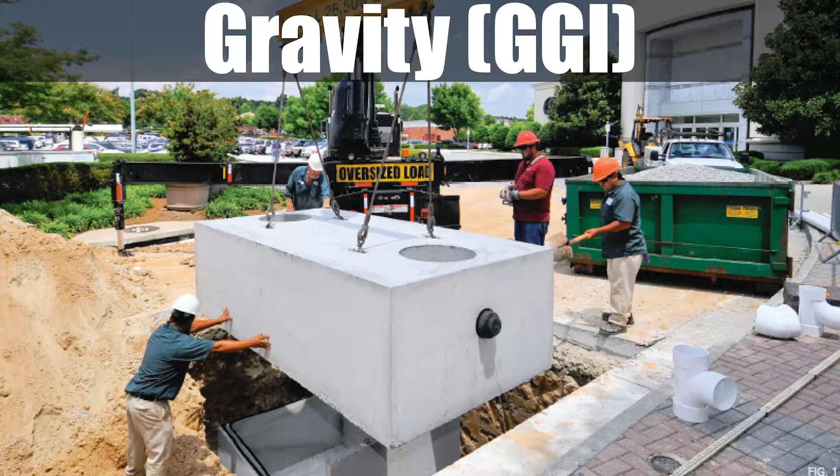So first we're going to start with technology. This is probably the most obvious one. It's the one that many people in my position would talk about because it's the one that we kind of know. Our company makes grease interceptors. And so predominantly we're going to be talking about grease interceptors when we're talking about technology. So gravity grease interceptors are what everyone is comfortable with. How many of you have seen a gravity grease interceptor installed in your area or have approved one or inspected one? Show of hands. Great.

Awesome. By the way, this is going to be interactive. I have an education background. I used to teach high schoolers. And so if I don't get good interactivity or good questions, if I'm not getting interrupted, I start to talk more slowly. So please, at any point in time, feel free to raise your hand, ask a question. I don't have a slated time for Q&A because I expect it to happen as we're talking through this.

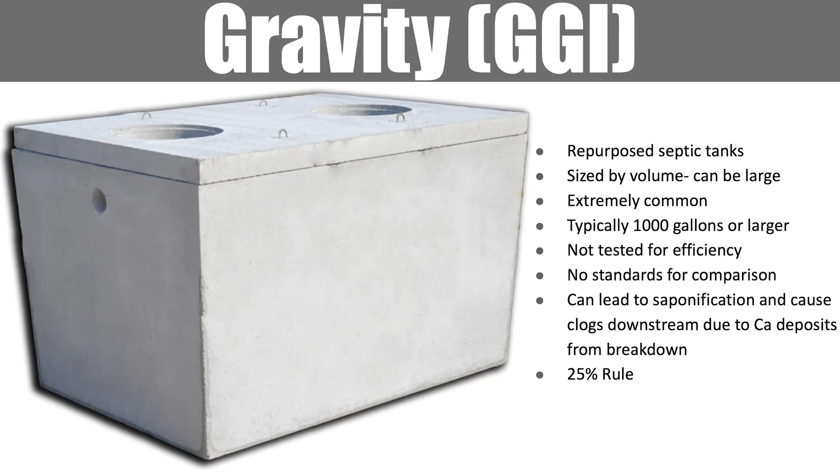All right? So gravity grease interceptors, these are really, really common. These are, many of them, repurposed septic tanks. Anyone that was in Ken's talk on Monday would know that. These are sized by volume, which means they can get quite large. They are extremely common. They're typically 1,000 gallons or larger. So 1,000 gallons is usually the small ones. And these are not tested for efficiency, and as such, there's really no good standard for comparison. Now, there are a number of brands that make these, but there's not a great way to say that this one is better or different in any way than another one.

This is kind of heavy stuff, but they can lead to saponification and cause clogs downstream due to calcium deposits from breakdowns. There's a lot of calcium in concrete in particular, and it can cause hard blockages in your downstream sewer system. And then these abide by the 25% rule, which we'll get into in a minute.

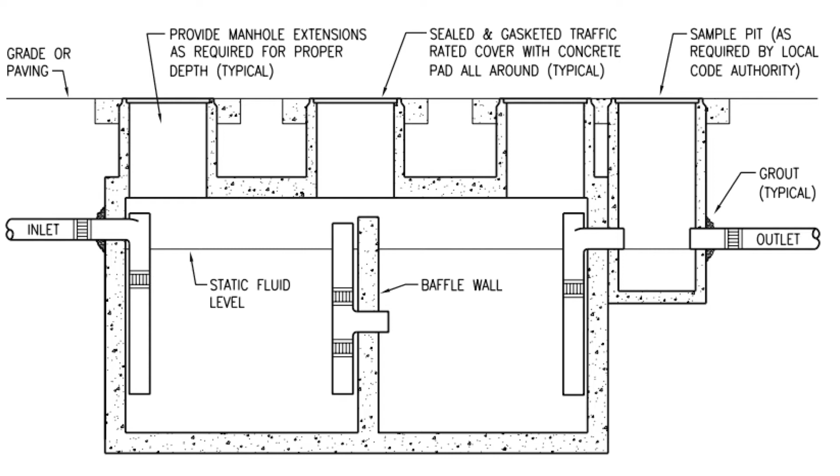So this is a standard cutaway of a gravity grease interceptor. You'll see many of them have multiple chambers, and this is to help with the capture of grease and the retention of grease. So grease interceptors should serve two functions. They should capture grease coming in, but then they should also hold on to grease that they've caught. Some of them won't have a baffle. Some of them are just one big open chamber. Some of them will have multiple baffles.

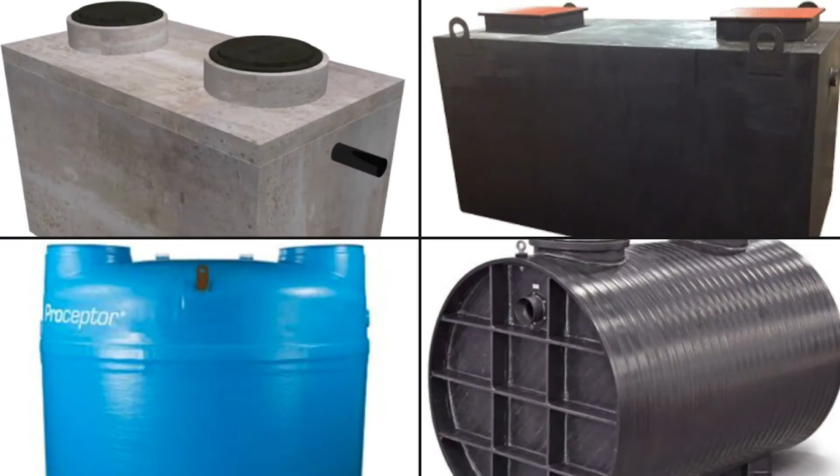So the most common material these are made out of is going to be concrete. Concrete is really cheap to manufacture. Concrete is what septic tanks have been made out of for a long time. And so concrete is what you probably have seen if you have approved these or inspected them in the field. But we also see these made out of steel nowadays, and concrete and steel, of the materials currently being used in production, are the ones that will break down and corrode because of the nasty environment that is a grease interceptor.

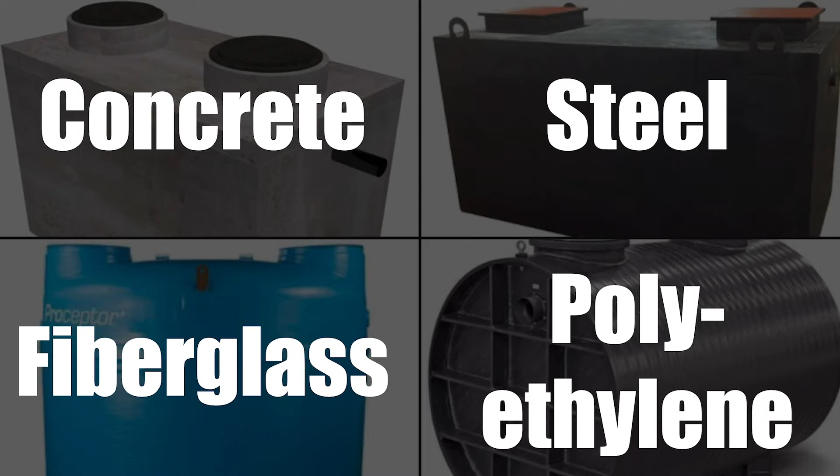Fiberglass is pretty common. It's going to have a long shelf life, but when it does break down and corrode, you've got fiberglass to deal with, and so it can be a mess if they ever do break. They're also a little bit more delicate in shipping. Polyethylene is what we're seeing some manufacturers moving to now.

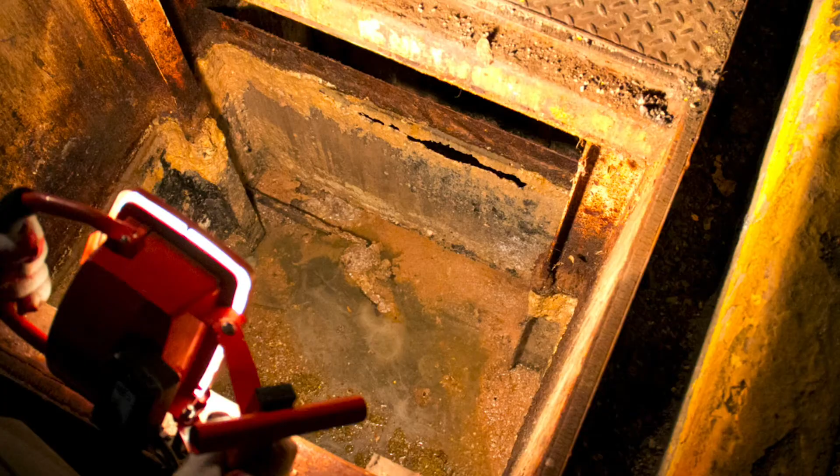So this is an example of a steel tank. This is a 5-year-old steel interceptor. You can see the baffle wall is totally corroded and had to be replaced. This is a concrete interceptor that was found leaking.

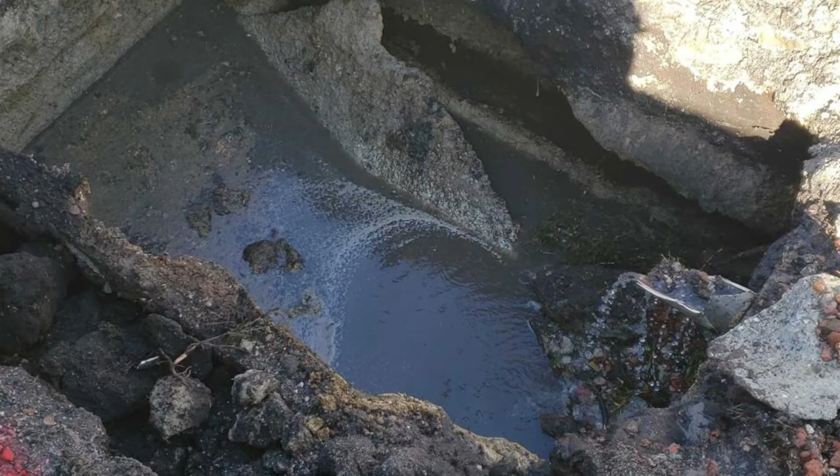Now this particular one, the city was going through a new code enforcement. This is in Miami-Dade County, Florida. The code enforcement required a changeover in their plan review process. Nobody could understand the new plan review process, so it took 4 months for them to get this replaced.

Meanwhile, the Olive Garden where this was installed was having to have 3 pump trucks per day come and put their hose straight into the inlet side of the interceptor to capture all of the effluent from the kitchen. Cost them over $350,000 in the 4 months it took to get through plan review.

So what kind of testing do these undergo? The hydrostatic water test. They fill it up with water, and if it hasn't leaked too much in 24 hours, it's good. I mean, you don't want it to leak too much, but this is the only test and certification that gravity grease interceptors have to undergo. They are assumed to work. They work on detention or retention time, depending on who you're talking to.

The challenge here is, the idea is that you have this big tank of water. When the kitchen effluent enters in, there should be some volume of water enough that the grease can rise and be separated and captured before it reaches the outlet side of the interceptor. Why this is kind of up for debate is no one can really agree on how long is the right amount of time. So looking across codes, you'll find codes that say 30 minutes is the right amount.

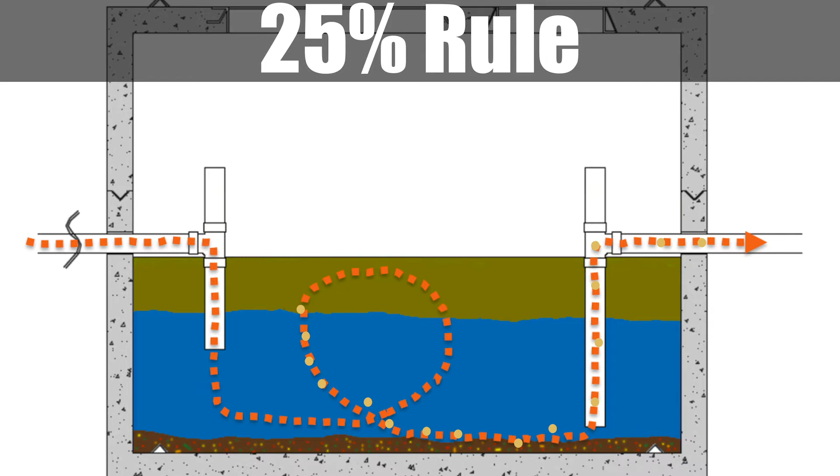So there is turbulent flow inside of a gravity grease interceptor because you have this big empty chamber, you have settled colder water coming in contact with hot water from the kitchen fixtures. When that happens, it becomes turbulent. There's no baffle structure, even in gravity grease interceptors with a baffle wall. This issue is actually worse than ones without.

You heard Ken Laux the other day reference the WRF study. This was done by NC State University and Joel Ducoste. And they found that without a baffle wall, it actually performed better. But what can happen is you get this turbulent effect, and the deeper the grease layer is built towards the flow of that turbulent water, the more likely it is to lose already captured grease.

And so you have to pump these out when they're 25% full of grease, which means 75% of a 1,000-gallon concrete grease interceptor is just holding water so that it can work properly. So if any of you are from a district where water is a premium resource, a lot of your water is just sitting in the ground so that the gravity grease interceptors in your district can work.

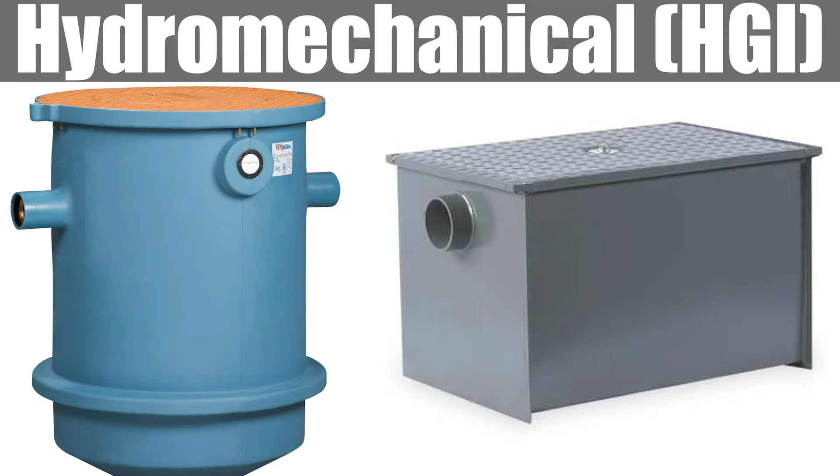So next up are hydromechanical grease interceptors. These are newer. The gravity grease interceptors are 100 years plus old technology. These are 40-ish years old, have been really engineered over the last 20 years. So hydromechanical grease interceptors are usually constructed of polyethylene, steel or fiberglass. There are not any hydromechanical grease interceptors made of concrete that I'm aware of.

These are sized by flow rate. They are not sized by volume. And they are typically less than 300 gallons in volume, though there are a couple of companies that are coming out with ones up to 1,000 gallons.

So instead of being full when they have 25% of their volume as grease, these can hold, some of them, as much as 90% of their volume with grease, which means you can hold the same amount of grease in a much smaller interceptor. So these use baffles and flow path to capture grease and not the detention time. So it is a different way of performing the same function that doesn't require as much volume. These have been engineered for grease capture and for grease retention.

As such, these are certified under a couple of different certifications. Most are certified under the ASME A112.14 or PDI G101. And they are tested for grease removal efficiency, and most of them are tested to maximum grease capacity. So most of these are tested to the failure point. I'll talk about that in a minute.

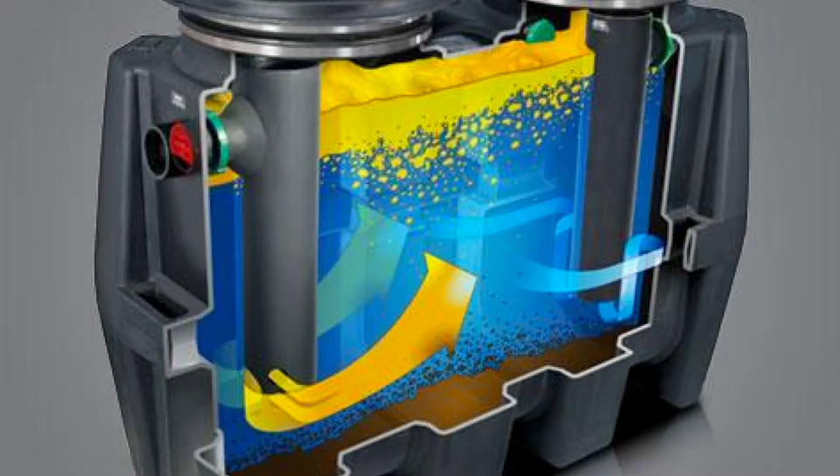So this is a cutaway of what one looks like. You'll notice it doesn't actually look all that different from a gravity grease interceptor. There is engineering that has gone into maximizing the flow path, making sure that the baffles are in the right place, making sure the inlet and outlet are appropriately oriented, that allow this to operate at a higher level of efficiency. So let's talk about the testing process.

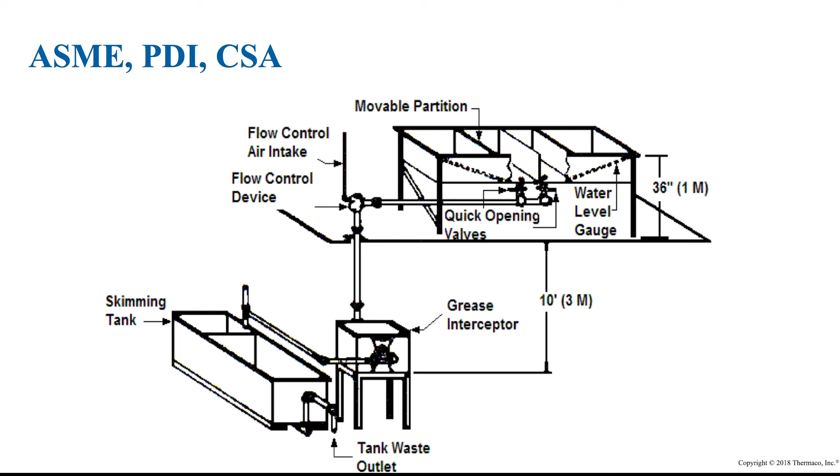So ASME, PDI, and CSA, these are three testing standards that are all pretty much exactly the same. This is how all hydromechanical grease interceptors that are certified are tested. You might find something online that is just a box that has no certification. That absolutely shouldn't be approved, but any of the large manufacturers are going to have these certifications. So here's how the test is done.

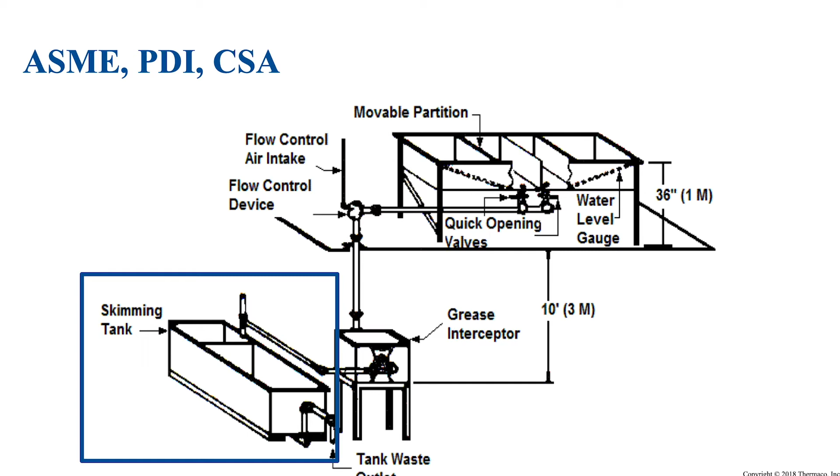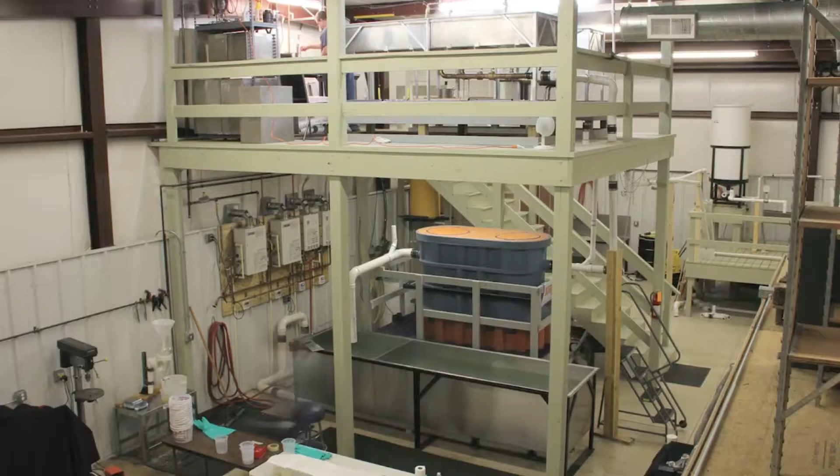We have a couple of sinks that we fill with water and a known amount of liquid lard. It then drops 10 feet into the grease interceptor, and we capture all of the effluent that comes out of the grease interceptor. We then measure how much liquid lard has escaped the interceptor and compare it to how much went in, and that allows us to calculate the efficiency. So this is a test rig. This is our test rig in North Carolina. You can see here we've got sinks up the top, goes through the grease interceptor, and then there's a skimming tank where we capture any grease that has escaped.

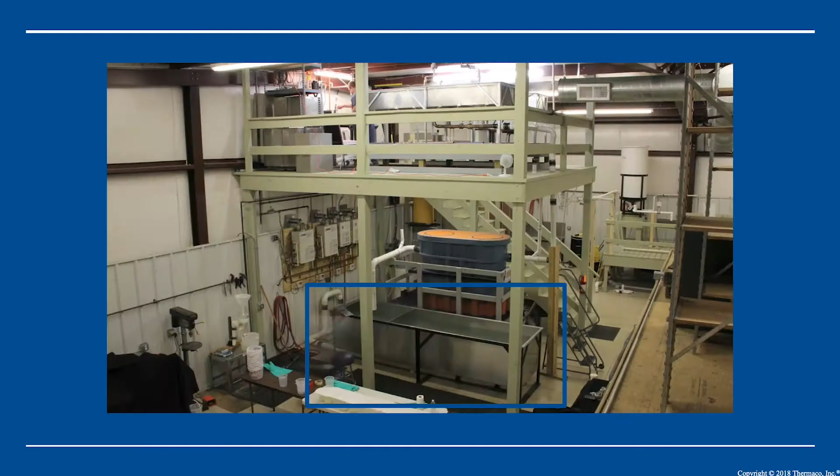So you have never seen chunks of lard as big as we have in our freezer at R&D. So this is being liquefied. It's being heated to between 150 and 160 degrees Fahrenheit. There it is, liquidy. We add water to 2 sink compartments between 150 and 160 degrees Fahrenheit. And we will add the lard to one of the 2 sink compartments, and we're going to be alternating.

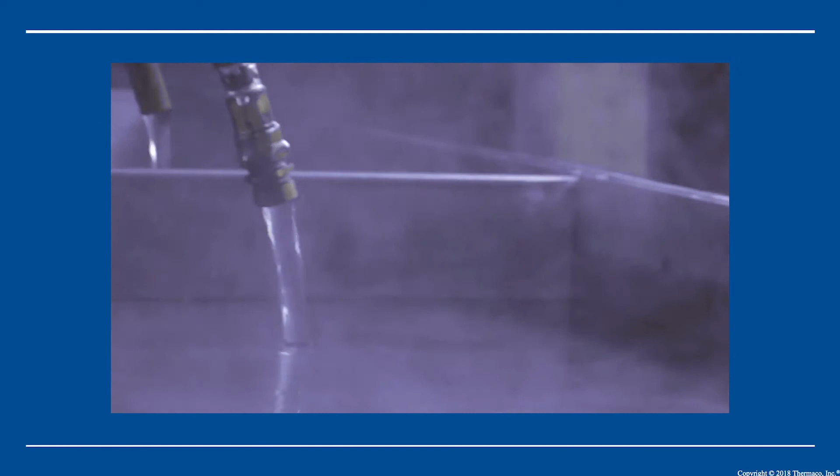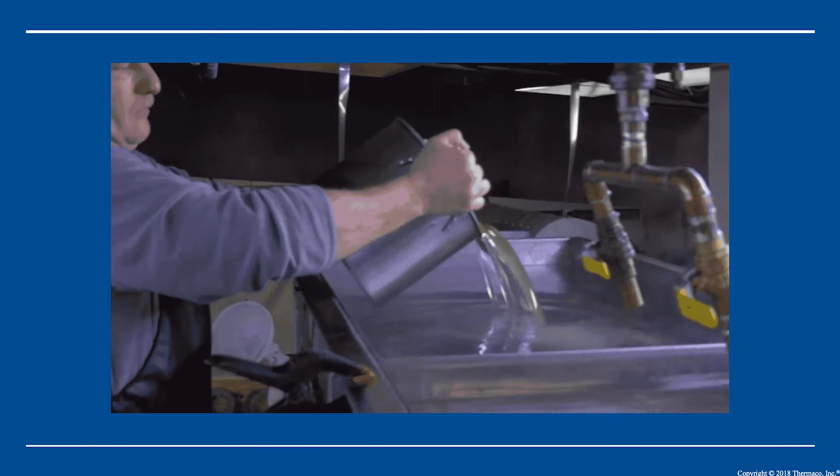Now, the amount of water that goes into the sink compartments is double the tested flow rate. So let's say we're testing for 100 gallon per minute flow rate. We would use 200 gallons of water per test, and we use 1 pound of lard for every 10 gallons of water. So in this one, we would use 20 pounds of lard. It then drops 10 feet through the interceptor, and we're capturing everything that comes out on the other side.

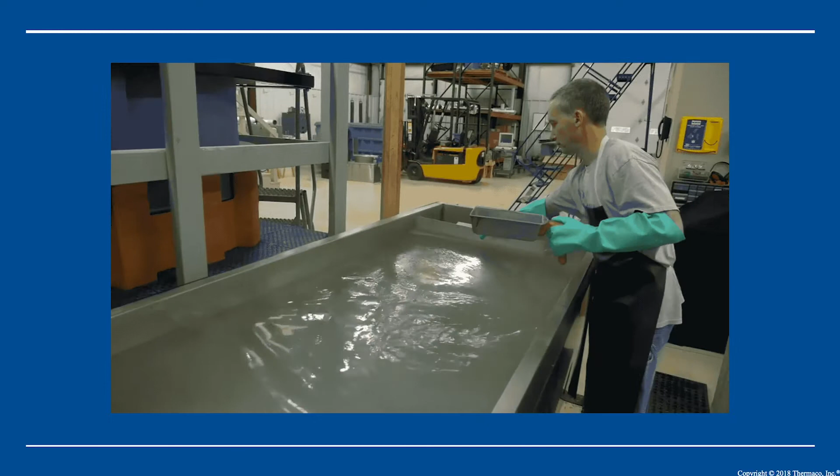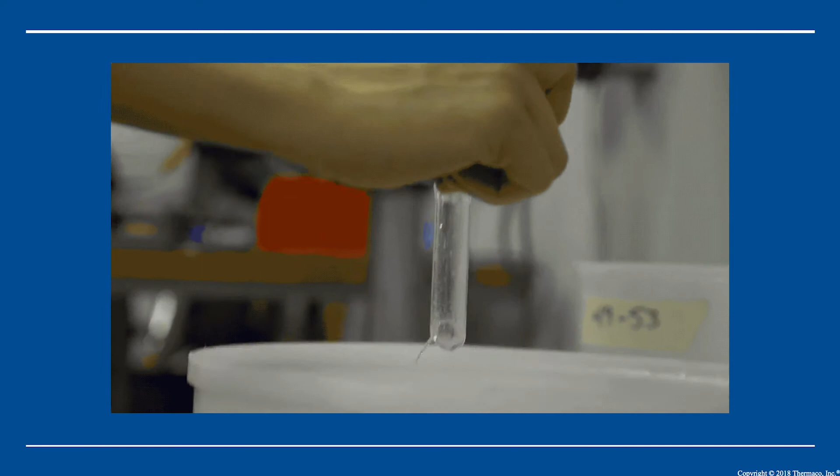We then skim off any of the liquefied lard that is going to be floating on top, and we're capturing that, and then we're going to pour it into a separatory funnel. And this is just to remove any extra water that we skimmed up. We then measure those, and we take those measurements, and we're going to calculate based off of the known amount of lard that went in, how much was able to escape.

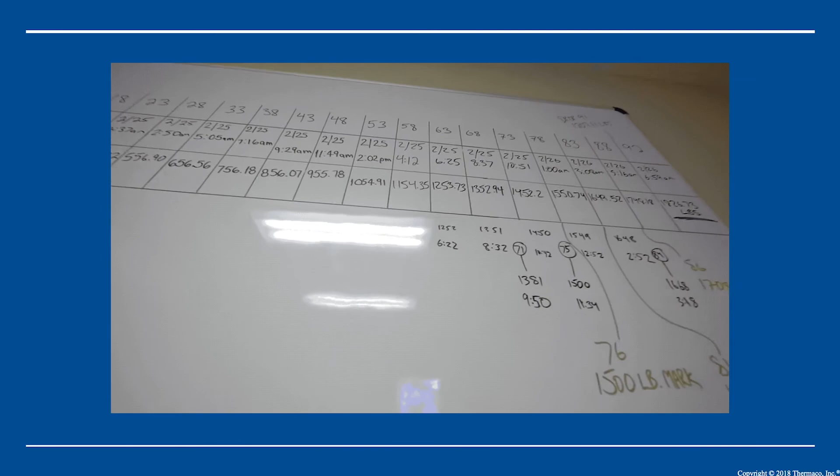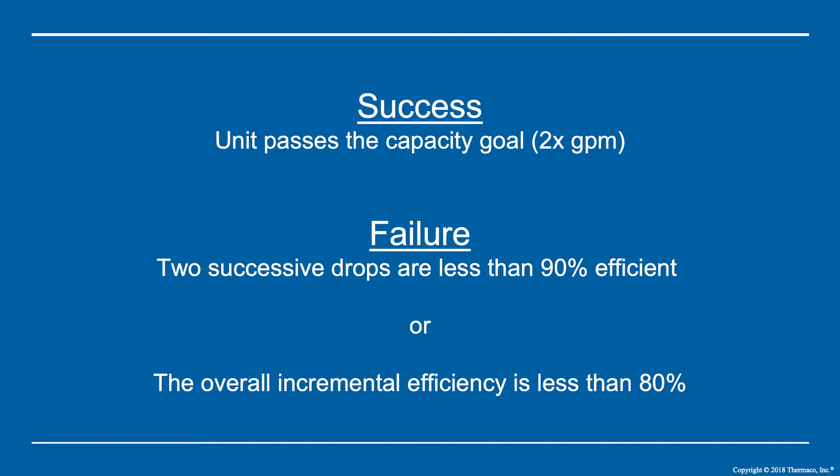And so success looks like the unit has passed with the capacity goal, which is 2 times the GPM. So a 100 gallon per minute unit has to hold 200 pounds of lard. Or 2 successive drops are less than 90% efficient. So 90% is the baseline efficiency. Or the overall incremental efficiency is less than 80%. So if there is just a failure, then the test is over. And we do this for 12 drops. And the efficiency is the grease added minus the grease skimmed over the grease added.

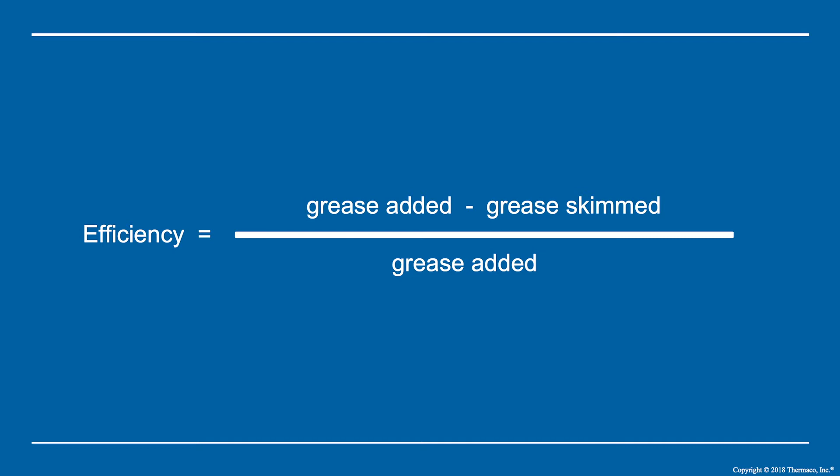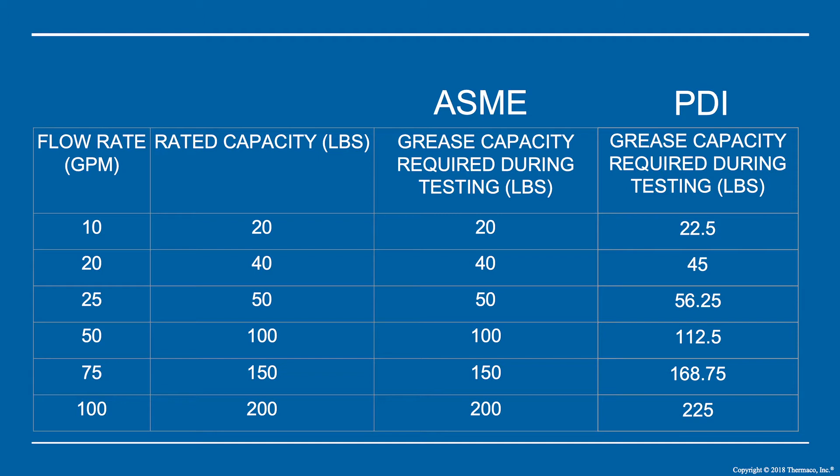And so with these tested units, you can ask, hey, what is your test results? You can see here they'll have the flow rate, their capacity. Now these are the minimums. Most of the hydromechanical interceptors on the market now will be tested to failure. So for instance, our 100 gallon per minute unit has to hold 200 pounds of grease. It holds 1,826 pounds of grease. So the minimum may be wildly different from what the reality is.

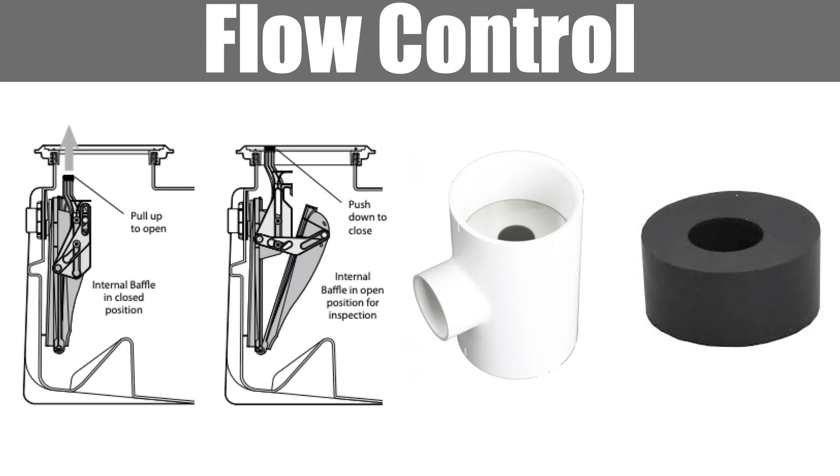So there are test reports. So if you have any question about, hey, how does a Trapzilla compare to a Schier, compare to an Endura, compare to a MIFAB, you can ask, hey, I'd like to see the test reports. Let me see the actual performance. And so you can compare apples to apples. Almost all of these devices have a flow control, and this is a part of the test. They ship either integrated into the interceptor or as an add-on piece.

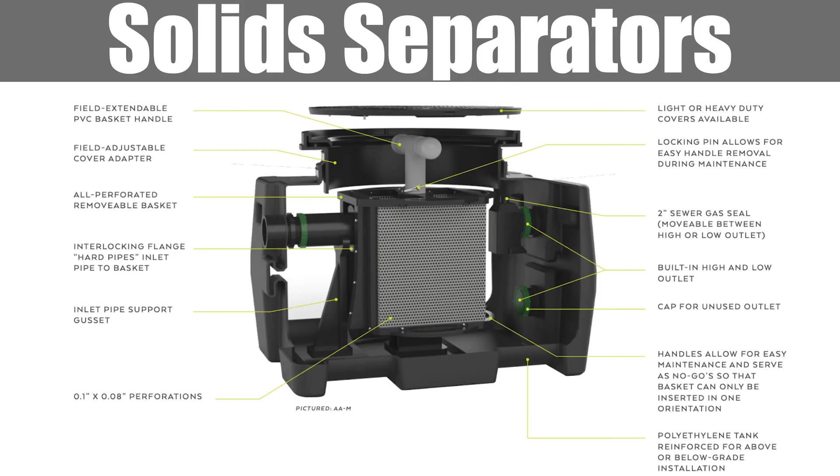Now, Ken brought up solids. Solids can be a problem for these hydromechanical grease interceptors. They have been engineered to maximize grease capture. They haven't been engineered to maximize solids capture. And so if you have a facility that's going to have a lot of solids, a lot of rice, buffet, something like that, we recommend installing a solids separator in front of the interceptor. They come in a variety of forms, but they're going to capture all the solids before the grease and water pass on into the grease interceptor.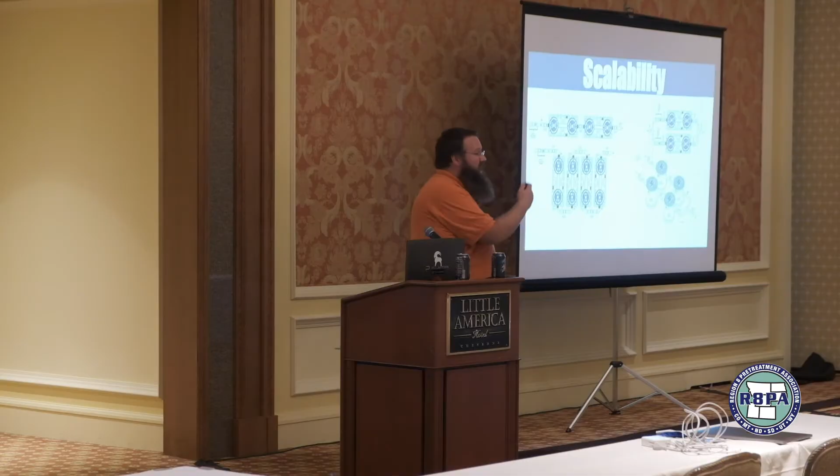So any of you that are living in or working in a downtown area, if you've got space constraints, hydromechanical grease interceptors can fit where gravity grease interceptors can't, and they can offer the same or sometimes even more grease capture. So, you have scalability as an option. Multiple units can be installed in series or in parallel to create higher flow rate situations or higher grease storage situations.

These are two examples. This one on the left has 2 solids interceptors and 6 gravity grease interceptors. This is the equivalent of a 6,000 gallon concrete gravity grease interceptor in a much smaller footprint. On the right is a system that actually splits. It splits twice. So this is capturing 400 GPM of flow into these 4 sections of interceptors.

This is installed at the Contemporary Resort in Orlando, Florida, at Disney World. They needed something to capture effluent from the 14th floor, but they didn't have any space because they're essentially landlocked. You build an amusement park, you can't expand if you don't have a space.

So how do we size these? Well, we size them by flow rate first. Right? They are certified to a specific flow rate. We got to size them by flow rate. But then, if any of you were in Ken's talk, he talks about grease production, and this is very important.

Now, these numbers are from ASPE, and these originated with a third-party study for grease production, and they measured the grease production for a number of different types of restaurants, put them into a chart, and said, this is pretty reliable, our best guess of how much grease will be produced per meal for a given cuisine type.

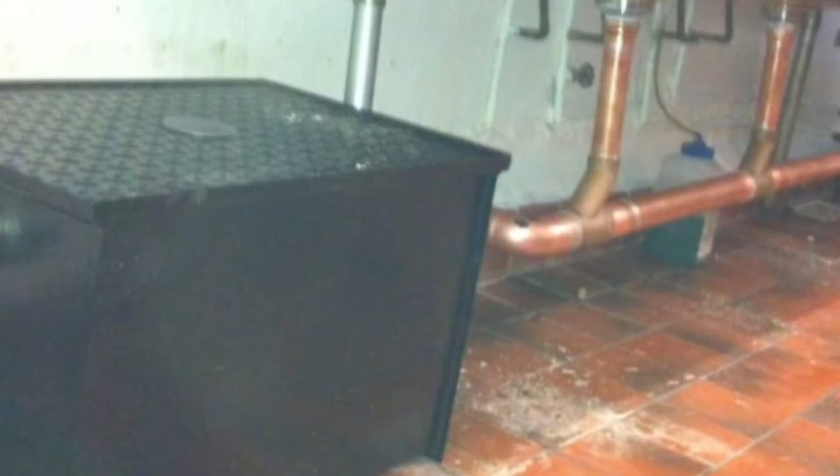So everybody has online sizing tools that look at dimensions of sinks and grease production sizing to offer best recommendations for what system needs to be put in place. Now, also under the hydromechanical grease interceptor umbrella are these undersink boxes, sometimes called passive interceptors. These are or should be certified to the same standard.

They usually are not tested to failure, because their failure is usually close to twice the flow rate. Right? So the box that we had outside was a 20 gallon per minute flow rate. It has to hold 40 pounds of grease. It's not going to hold much more than 40 pounds of grease and still pass that 90% efficiency mark, right?

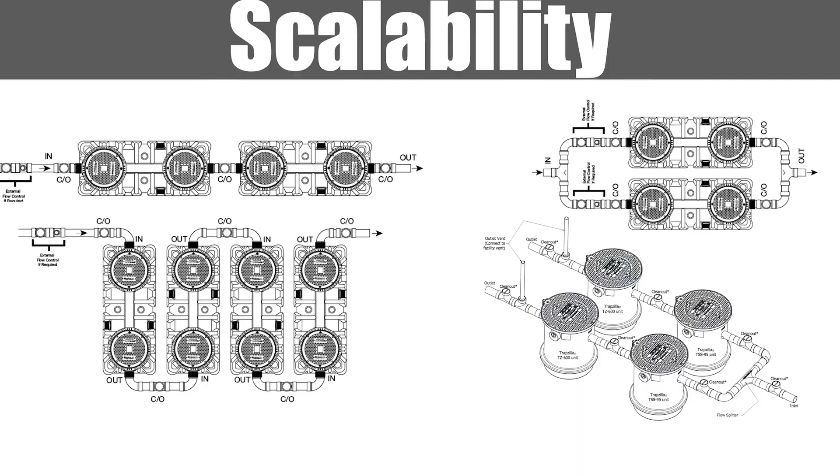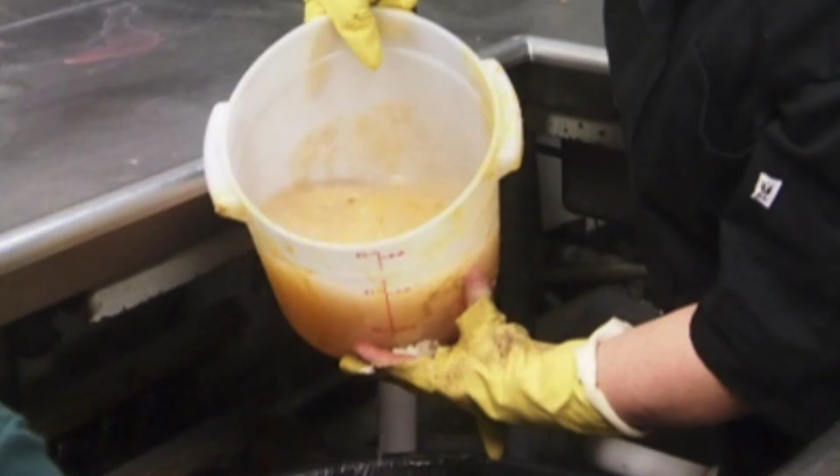I don't know if any of you guys have these or allow your FSEs to self-clean them, but we found this shot on Twitter. This is the CEO of a culinary arts school for troubled teens. They bring them in and they teach them these skills. And so she, I don't know if it's diplomatic, but I see some have already noticed the gloves.

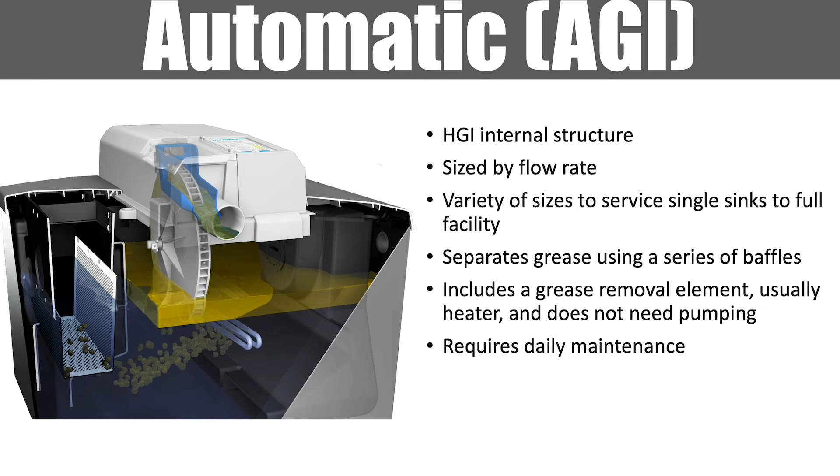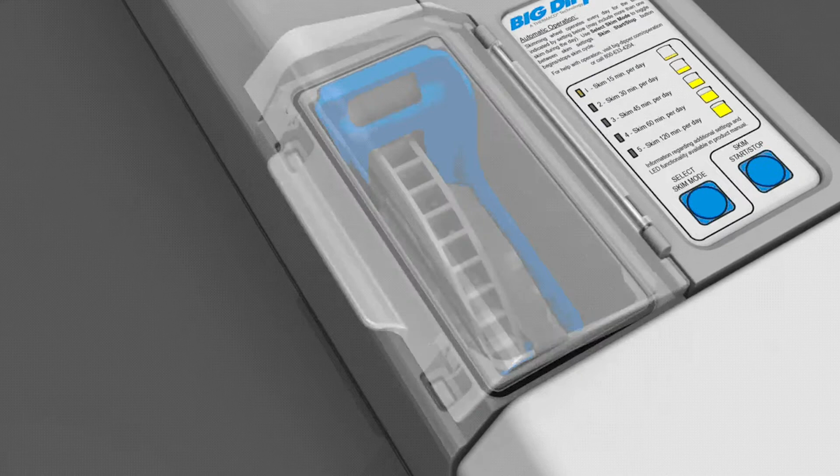So for the FSEs that don't want to have to do this but are allowed to self-clean, automatic grease interceptors are the solution. Automatic grease interceptors combine the efficiency and the certifications of hydromechanical grease interceptors with effectively daily pumping. So you imagine this large tank being emptied out every single day. You're not going to have a bypass because you're not having much, if any, grease accumulation. Most of these are designed to completely empty all of the grease contents every 24 hours.

So at most you have 23.59 hours worth of grease accumulation. It's almost nothing. So let's look at these. They have a hydromechanical grease interceptor internal structure. So they have baffles, they capture the grease the exact same as the other HGIs we were talking about.

So you unplug these. If you take out any of the electronic parts and put a flat top lid on it, it's going to work as a passive hydromechanical grease interceptor, and it will fill up until it reaches its capacity. These are also sized by flow rate. There are a variety of sizes to service single sinks all the way to a full facility. So there are some facilities where they might have a large system in the basement capturing the full kitchen. Sometimes one of these just goes right next to the pre-rinse sink.

They also separate grease using baffles. They include a grease removal element, which is usually a heater, but the system doesn't need to be pumped to be emptied. They do require some daily maintenance. Most of them require less than 5 minutes a day of daily maintenance. It's pretty straightforward, and it does need electrical power. But these also should be certified under the ASME and PDI certifications.

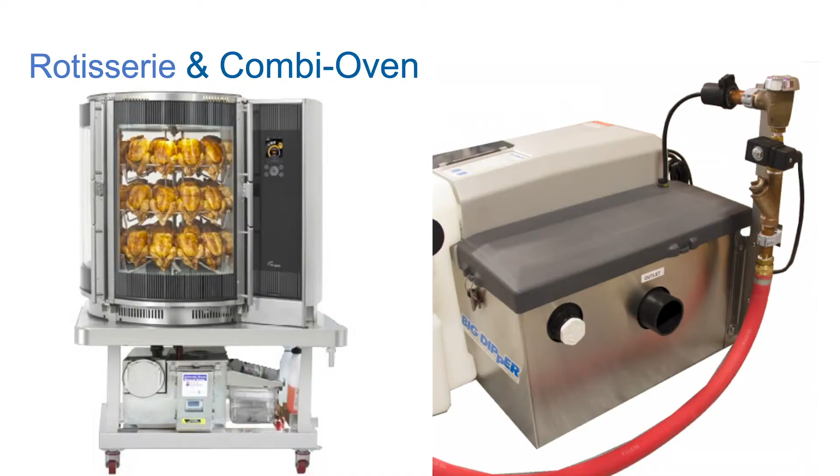Now, what do you guys do with that effluent? This can go into a unit like this, and all of the automatic units that are designed for combi ovens will have a supplemental water supply so that there's a balance between the water in the tank and the fat coming off of the chicken so that it rises to the top. If you don't have that, they'll fill up with fat because the only thing it's accepting is the fat from the rotisseries.

All right, and then last, this is an honorable mention. Show of hands, does anybody allow dosing at the restaurant level, chemical or biological? Great, we'll skip it then. Almost no place does, and at best, it will clean out the grease interceptor and pass the problem down to their neighbor. All right, so back to the stool.

The next leg of the stool is servicing. So servicing is going to be measured by things like grease depth, service frequency, separator inspections, camera line inspections, effluent testing, and it could include the degree of service the interceptor is receiving, the frequency of the service, site inspections, or sampling. Any questions yet before we move on to the next leg of the stool? All right, slow to yes.

The performance report, is that something that's found on your guys' website, or is that something that you have to email to figure out? Just open information. Yeah, great question. Question was, the testing reports, is that something that's just freely available information or something you got behind a closed door? It depends on the manufacturer. Some manufacturers are very forthcoming with that. Some kind of tuck it away.

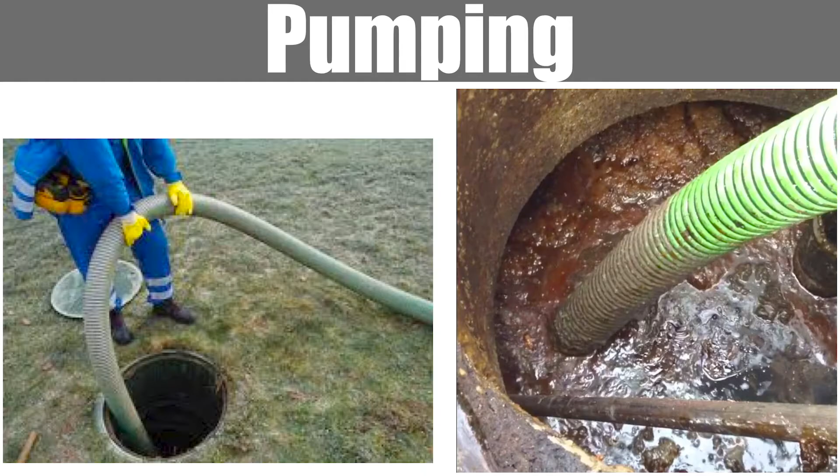All right, so servicing. You guys are going to be familiar with most of these. This is pumping. Oh, servicing. Let's talk about this for a second. So, technology is where you have the greatest level of control. Right? Your codes dictate what technology is and is not available in your district. And talking to many of you here, there is disagreement within your codes as to what is and is not allowed in your district. Right? Everyone has a different opinion.

Servicing is where you have some control, but even less than the technology. Right? So now we're seeing a lower degree of control here. Some of you have built servicing control into your FOG programs. Many of you that I've talked to this week have not. So pumping is a piece of control. Are they being pumped properly? Are the interceptors being pumped out to a standard that you're happy with? Do you feel like they've been completely emptied? Do you feel like they've been scraped down, sprayed down?

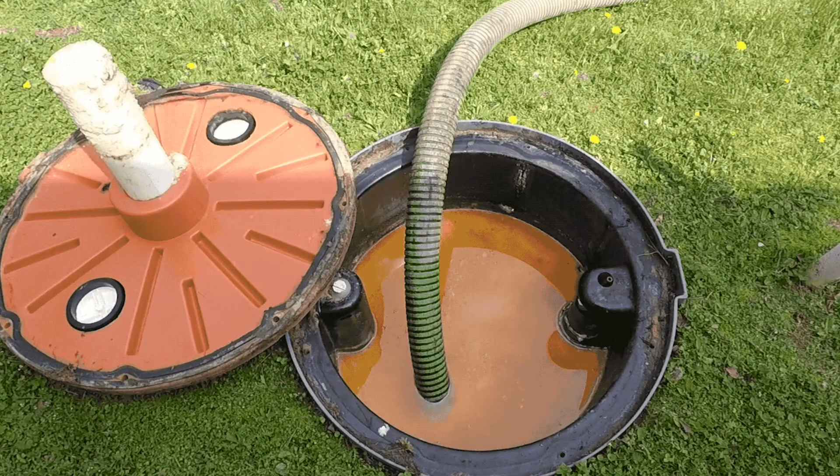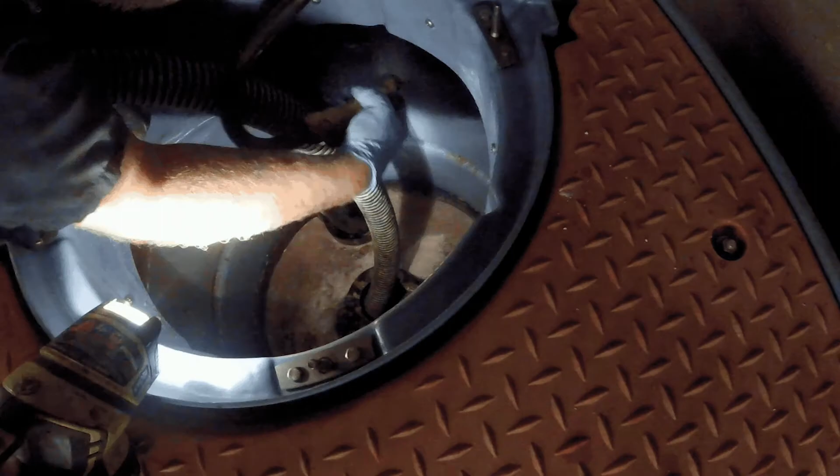And this is an example of a hydromechanical being pumped out. And this one has 2-stage, so solids are underneath that baffle. Here's a spray down that's being done. Is spray down something that the manufacturer recommends? Is a scrape down something that the manufacturer recommends or allows? And that's going to depend on the material.

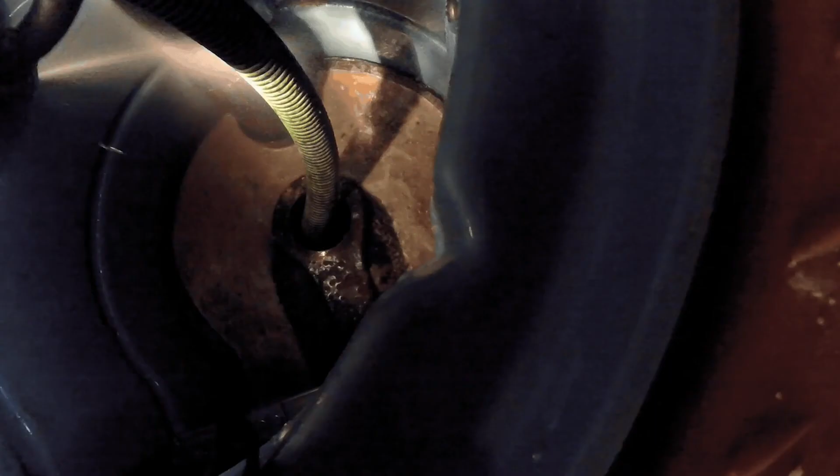They should all, once emptied, and they should be completely emptied, be filled up, which is a lot to ask. It's a lot of water, especially for a gravity grease interceptor. But you've got this boat now that's empty, sitting underground. What's going to happen over time, especially if you're in one of the high water table areas? It's going to float up. So, that's a best practice.

Inspection is something you guys need to be looking at. Are the baffles in good working order? Does this tank look good? We've already seen these. Inspection also involves sludge judges or core samples. How many of you guys do this on any of the interceptors in your district? So about half, yeah.

This is easy for gravity grease interceptors. You're looking, is 25% of it solids and grease? Yes, it's time to pump. For hydromechanical, every hydromechanical company is going to have some sort of chart like this that tells you what the depths are going to be for taking a core sample.

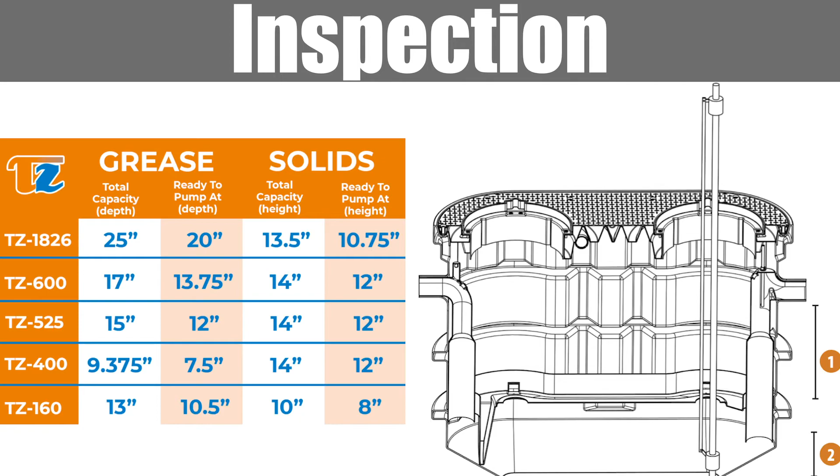Let's say this is the first Schier unit or first Trapzilla unit you've ever seen in your district. You're probably going to want to take some core samples of that just to make sure, over the first couple of months, maybe every quarter for the first year, that you're getting what you would expect to see out of that and help set the FSE up on the correct pumping schedule.

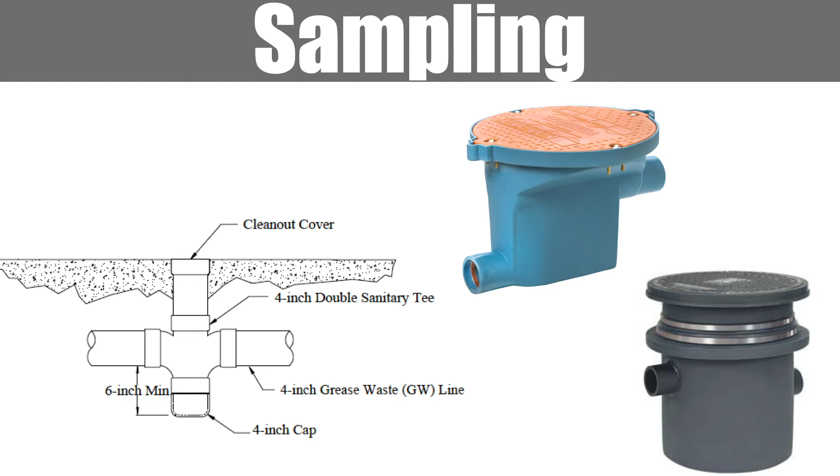And there's going to be downstream sampling. Now, I heard some people talk about the GGIs having sample boxes built in. Some have manufactured sample boxes. In our experience with testing, it is always best to test downstream of the interceptor and not do outlet pipe testing. The test samples are going to be more reliable that way. Most of the manufacturers that have sample boxes have some that have a drop and some that just have a steady flow through.

And then based on what you're finding in the field, you should be adjusting what the FSE is and isn't allowed to do. Right? If the sample is coming up that something is not looking like you would expect it to, then maybe there's another piece of this puzzle that needs to be examined further.

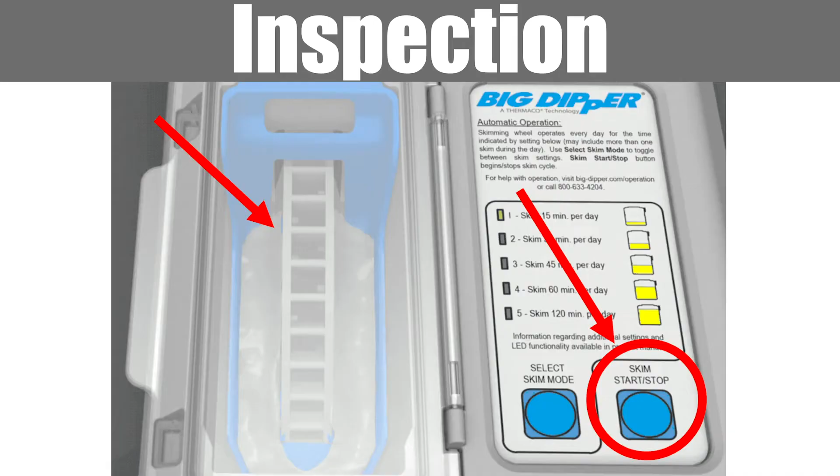If you encounter automatic units, you're going to want to see, hey, is the power on, right? These things are being skimmed every day by a motor that has to have electricity. So if the power's not on, it's not working. You can test all of them. All of them have some sort of a test button. You press the button, and the inner workings are going to start up right away. You can see, hey, is this working? If it's not, then that's a red flag.

You should inspect the solids area. There are some areas on these things that they should be managing daily. If they're not, if you open it up and you see the solids is just packed full, like they've got fruitcake in there, that's a problem. That's a sign of neglect. Your codes should hopefully allow you the leeway to have some enforcement. If they have agreed to perform maintenance on something like this, and they are failing to do so, it should be the same enforcement as if they have failed to have it pumped.

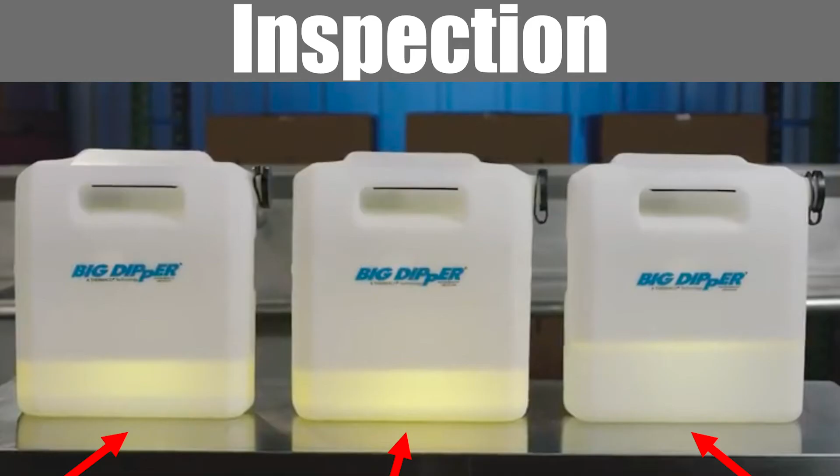You can also inspect to see, hey, are the settings correct? Most of these systems are designed to take out all of the grease and just a little bit of water. We want to get all of the grease out. So if, like in the center picture, it's 100% water or 100% grease, then they probably haven't run it enough, and they're going to get grease buildup over time.

If it's like the one on the right, where it's no grease and water, there's a place now in our town that's doing pre-made health food, like they're packaging salads, and they do them all in one day. They do one day of food prep, they put them in the fridge, and they just sell them for pickup through the day. What happens is people think, well, there's not any grease coming out, so I've got to turn up the settings and make it skim more, right? Well, there's no grease coming out because there's no grease going in. So if you see this, they need to turn it down because they're burning out their motor.

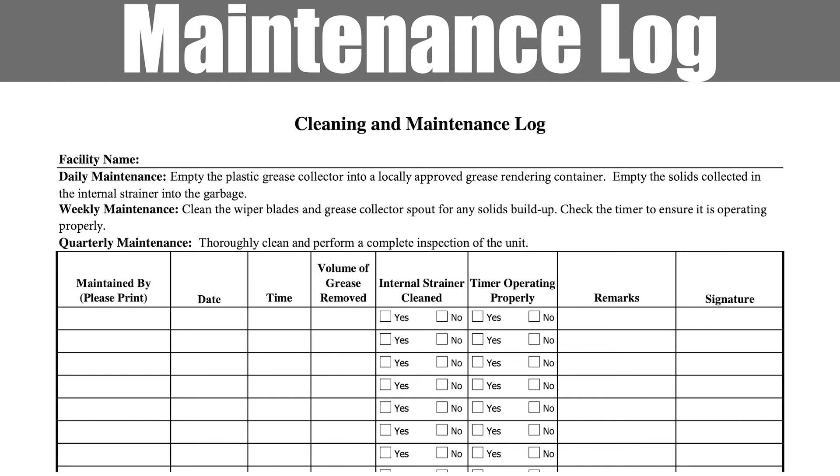And then you should ask them to do a maintenance log, right? The control that you have here is more sporadic because you're not there every day for this. You can rubber stamp the technology going in, but once you do so, you're relying on them to do the right thing daily, especially if your codes don't give you some enforcement oversight. If you're asking for maintenance logs and the maintenance log says this was emptied today, and it looks like it's not been emptied for a month, then something is amiss and there needs to be some enforcement consequence.

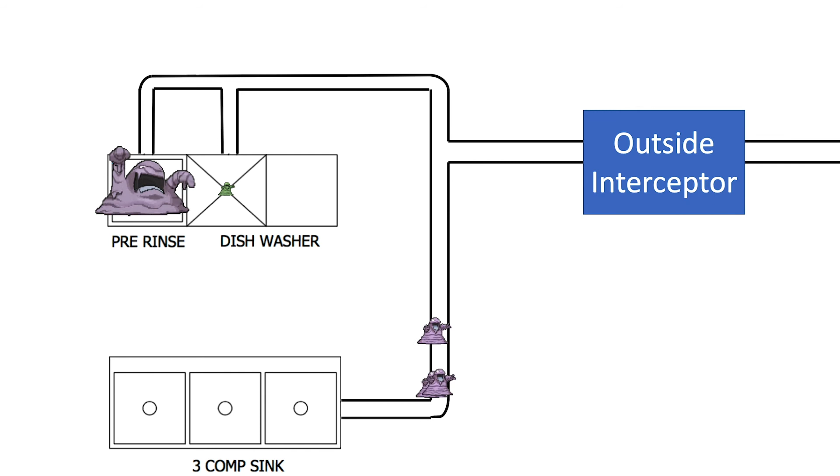So let me know if this tracks with you. So the FOG from the 3-comp sink is going down the drain and is being captured by the interceptor. FOG from the pre-rinse sink is going down the drain and being captured by the interceptor. And then the emulsified FOG from the dishwasher, depending on the type of interceptor, is going down the drain and being either captured or maybe it's escaping, depending on the interceptor.

Right? Emulsification requires two things. It requires a detergent, which is going to make the FOG behave more like water in the flow of water, and it requires a shearing force. The FOG has to be ripped apart into smaller globules so that the detergent and the water and the FOG can kind of hold hands and have a party. And now, emulsified FOG is behaving more like free-floating water. Right? Is this how an interceptor system works and all the stuff in the kitchen? Does that track with anybody? Yeah?

What kind of food do they serve? Fancy. Not a plate. Fancy food. American fare.

Did that not look right, that process, to anybody? Good. All right, so here's what's happening inside either the pre-rinse or the 3-comp. Pre-rinses, depending on who's in the kitchen that day, will either have impounded flows or they're using the spray wand, right? In either instance, how much flow is helping the grease? If they've got an impounded flow, where's the grease in the sink? It's at the top, right? The sink is acting as a grease interceptor. The grease doesn't know to do anything but float, right? It doesn't care what container it's in, it's always floating. So the grease is floating at the top.

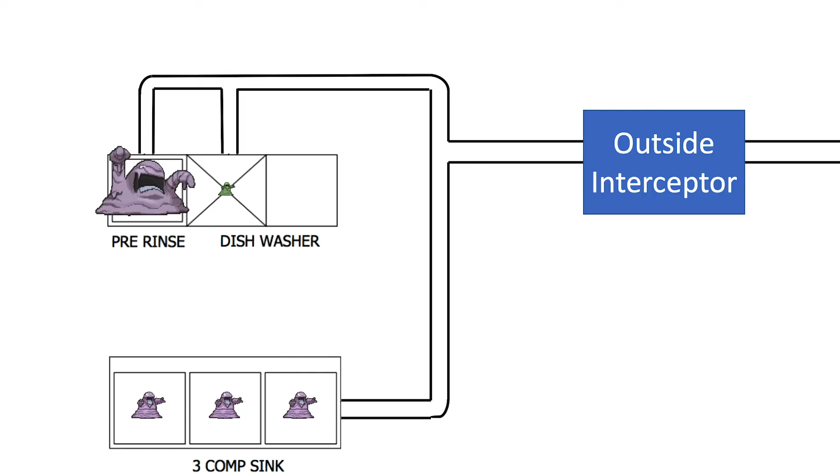So the majority of the grease is coming from the pre-rinse, right? So the 3-comp sink drops. They're dropping that, and maybe some of the FOG is kind of meandering its way down there because maybe this one was not an impounded flow. And they drop the pre-rinse, and the pre-rinse has a long journey with no water flow pushing its way down. And so it's hanging out in the pipes. And then what happens next?

The dishwasher. And what do we know about the dishwasher? It's probably hot, which is good for separation, but it also makes it easier for mixing. And I believe someone even said it in Ken's presentation on Tuesday. What can cause a shearing force? The jets can, but what happening here can cause a shearing force? Turbulence in the pipes, right? The plumbing itself can be the impetus for a shearing force.

And so what we discovered was happening next is the dishwasher discharges with very little FOG in it, but what is it doing? It's emulsifying some of the FOG that's hanging out in the plumbing. And so there's greater FOG loss downstream than there ought to be because of this. And so here was the solution we came up with. We put in a prototype emulsion fighter, right? This literally was just a second sink, basically. It was a holding tank. It could have been a 5-gallon bucket.